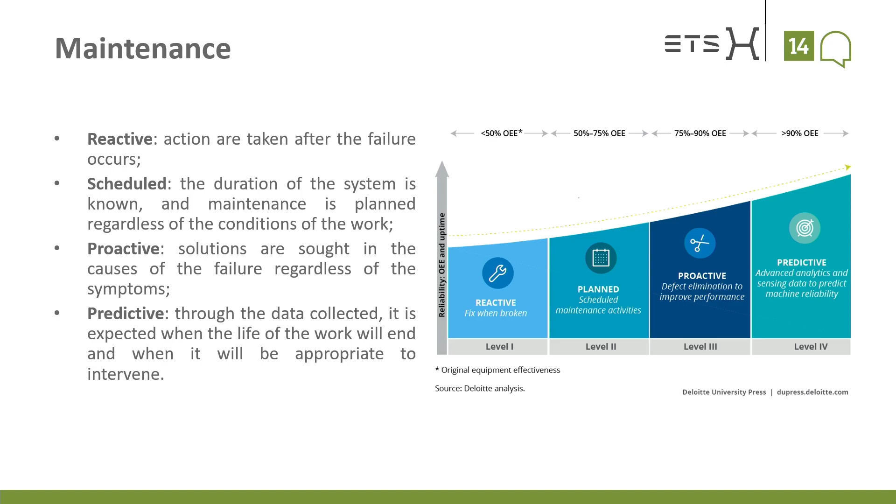They will say that to have an efficient plant, you need to have at least a proactive maintenance, not least a predictive maintenance. So obviously in our case we have a lot of randomness in our sector, but it's just to say that our maintenance is mostly reactive and planned. Only in few cases are we in the proactive, predictive case. So actually some of our colleagues will say that our plants, so our infrastructures and our tunneling also, are not so efficient from this point of view.

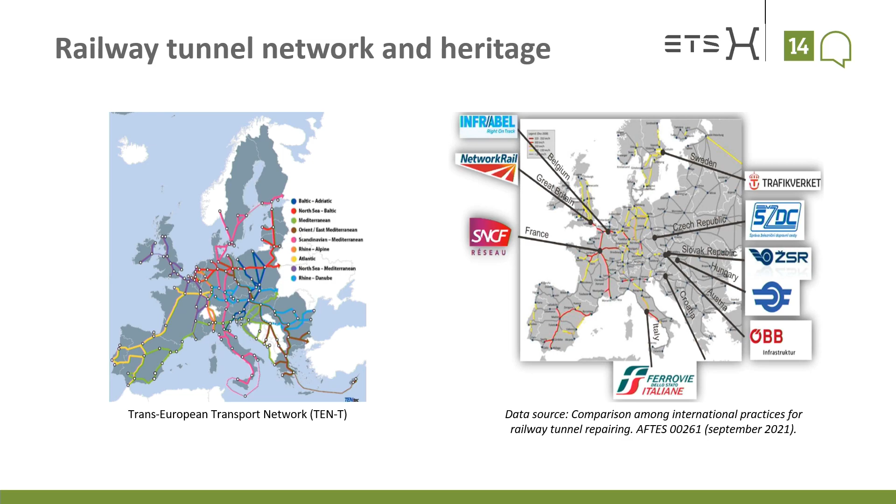In which framework are we going to talk about this? This is just an extract from a paper that collects data from, let's say, major authorities all around Europe. And here you will see some of them, all of them considering also the Trans-European Transport Network. And here we show some data for railway tunnels.

Then I will just add a few elements also for road and highways. As you can see here, we have a lot of tunnels in Europe, in Italy, in France, in UK. We are the one having the most tunnels from the railway point of view. And the average age of these tunnels is, in some cases, more than 100 years.

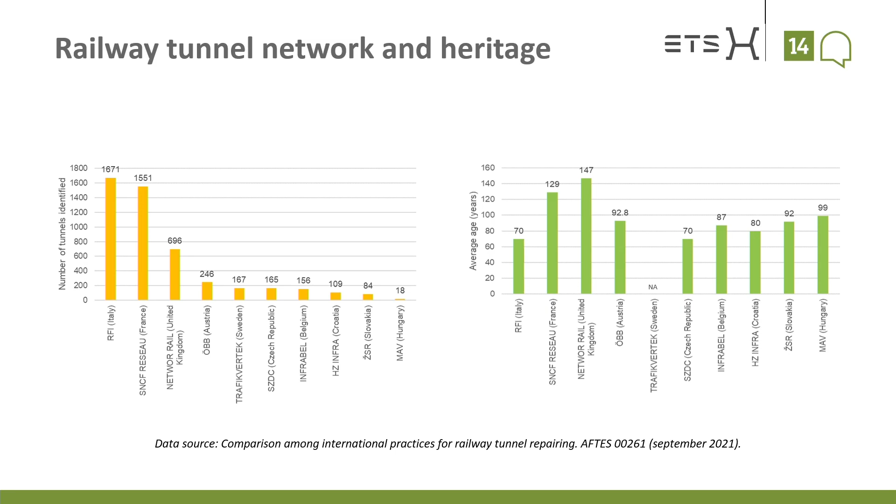The data from Italy is a bit biased, because in the last 20 years we excavated a lot of mechanized tunnels. This is the reason why, if you remove some of these tunnels, our average age would be the same as France, more or less. So we have a lot of old tunnels. They are like old people, and we are asking them, okay, don't retire, please continue to work, and we need to find some strategy on this to let them continue to work.

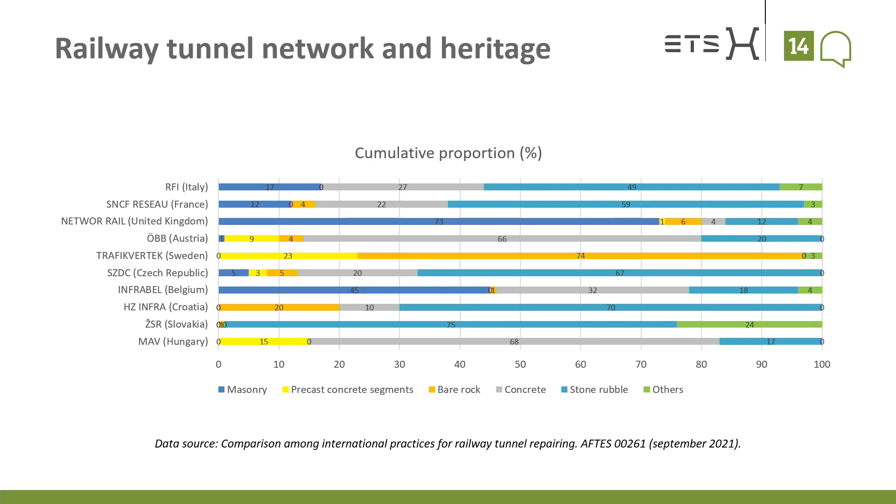Now we will go inside the framework. I will mostly refer to Archita when talking about technological aspects for tunneling, survey and inspection, and I will talk about MIRET for the engineering and analysis framework. You will understand in a few moments what I'm talking about. So the framework is called MIRET: Management and Identification of the Risk for Existing Tunnels.

The principles are the same. You can recognize some of the things Farid was showing in the previous presentation. What we are saying is that for the maintenance and management of tunnels, we need a holistic approach. It means we cannot analyze the single component. We need to analyze the relationship between these components, because this relationship makes the whole system more important than the single elements inside.

It's more or less like a human body. We cannot analyze just the arm or the leg to say, oh, I have an injury to my knee, so I'll just analyze the leg. I need to analyze the whole body to understand what is going on.

We will see what we can do from the innovation and state-of-the-art point of view for all these elements. First of all, the survey and inspection phase. Nowadays, we have a lot of mobile mapping technologies that can help. Destructive tests are really important, but we need to collect data in a less intrusive way, to increase safety and minimize the impact on traffic.

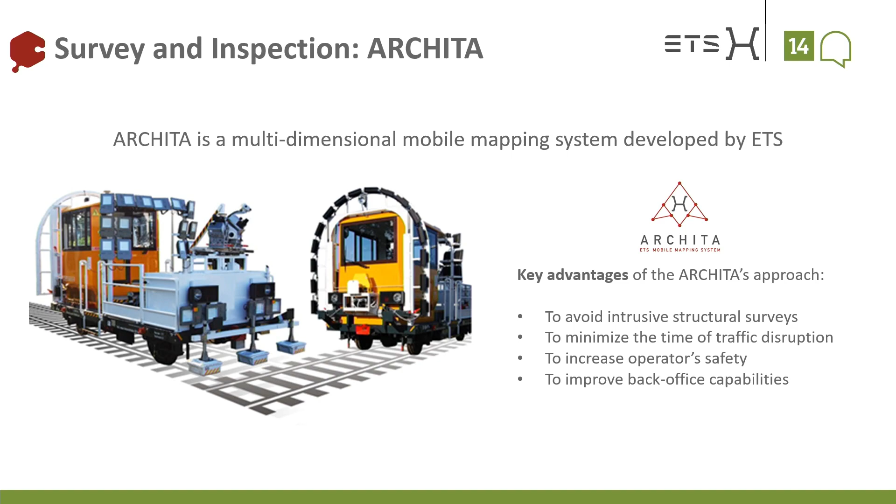This is ours. You will find other similar elements, but I will just talk about what is unique from this system. Archita is a mobile mapping system, multidimensional. We will see in a few moments what that means. Multidimensional is because in a single passage we can gather more than one type of information, more than one dimension. These dimensions are all taken together inside one environment, or multiple linked environments. So once we do the passage, we gather a multidimensional system.

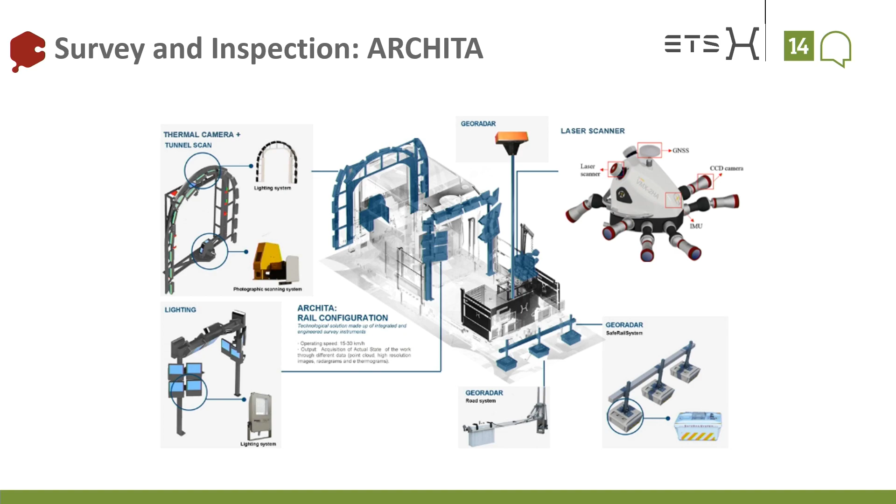In this case, we have different technologies. Here you can see laser scanner, tunnel scanning system, ground penetrating radar, and so on. But before talking about the system, let's watch a quick video that speaks louder than me.

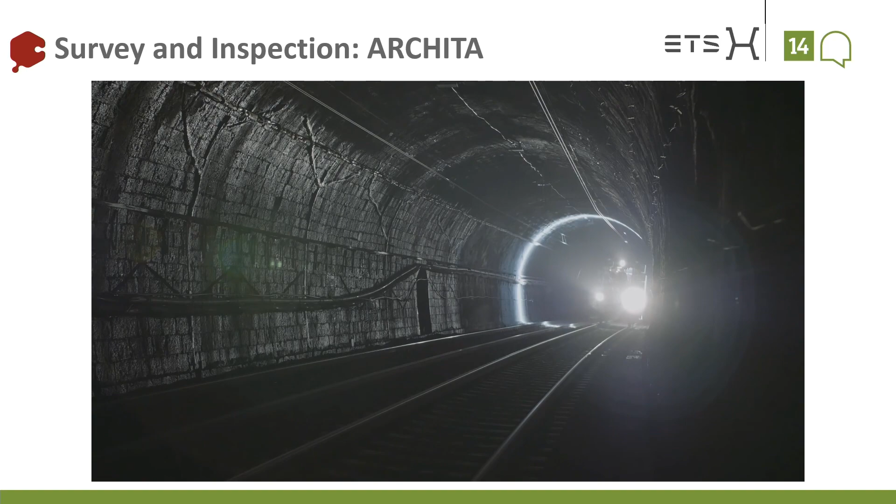As you can see, this is Archita going inside an old masonry tunnel, passing with this light all around. You can see our blue logo on the front. But that was Archita. In that passage, what was Archita acquiring? Let's see.

First of all, we have the scanning system, which is the equivalent of the inspection phase, like the traditional inspection phase. You have a photo scanning system that lets you acquire a prospect of the tunnel, as you can see on the bottom right. This prospect of the tunnel has a precision and accuracy of 1 millimeter, so we can detect everything more than 1 millimeter.

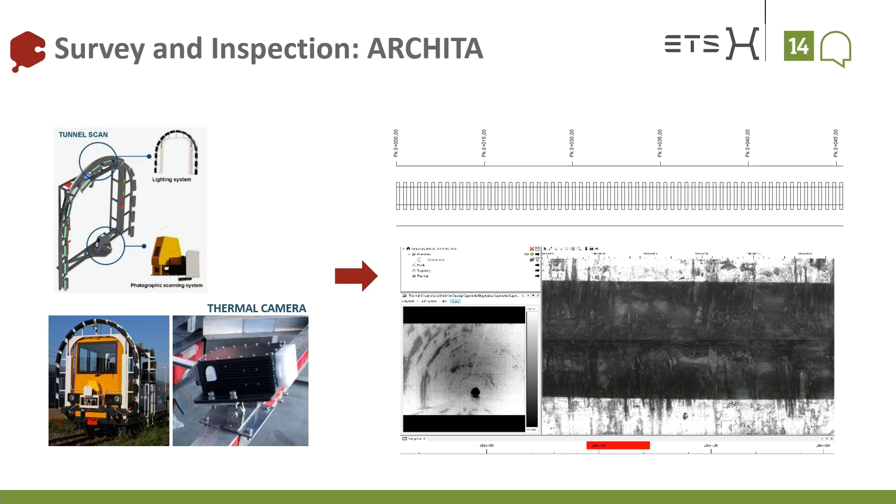Linked to this element, we have the thermal camera. The element you see on the left is the thermal camera, and everything has a profilometer, and everything is referenced. The elements on the thermal images correspond to the HD photo, so you can go inside the tunnel and see the correspondence between them. This redundancy is fundamental because, as you've seen from the previous presentation, one of the major problems in tunnels is water. It's quite normal, so it's fundamental to have this redundancy to better understand some of the problems you can encounter inside the tunnel.

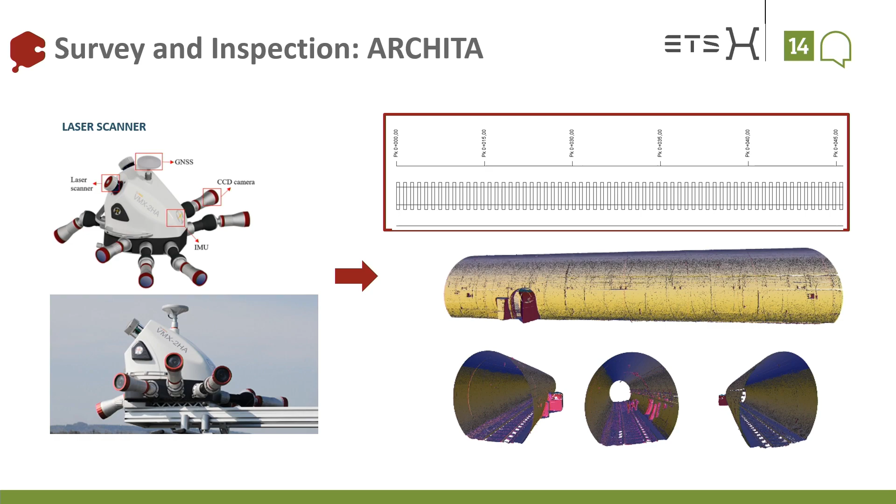Then you have a laser scanner. This is to acquire a 3D point cloud, and this is a really technological aspect. We bought a fantastic new laser scanner, but you can find a lot of fantastic laser scanners on the market.

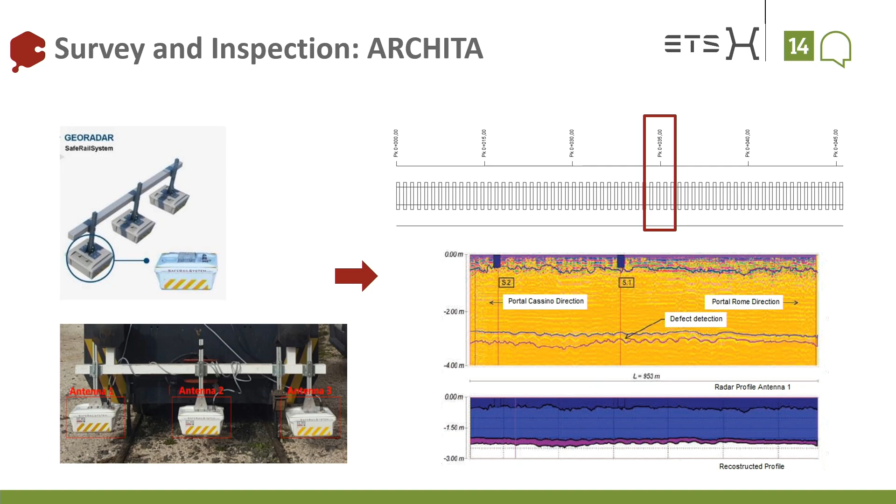Then we have ground penetration radar on the bottom. Ground penetration radar allows you to acquire information on the configuration, for instance in rail about ballast, about voids, about humidity, about thicknesses, and in the road configuration, about the pavement package. So this can work in both configurations, even if we are focusing on rail right now.

Then we have something that is quite particular. We have a ground penetration radar for lining, which has a semi-automated system to acquire data on the lining during the mobile phase. Right now we are also investing in robotizing this element, so it's something we are prototyping right now.

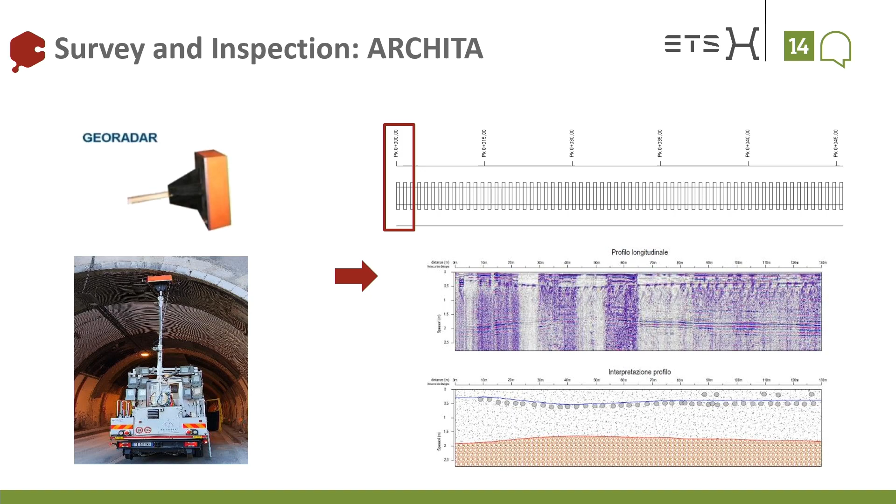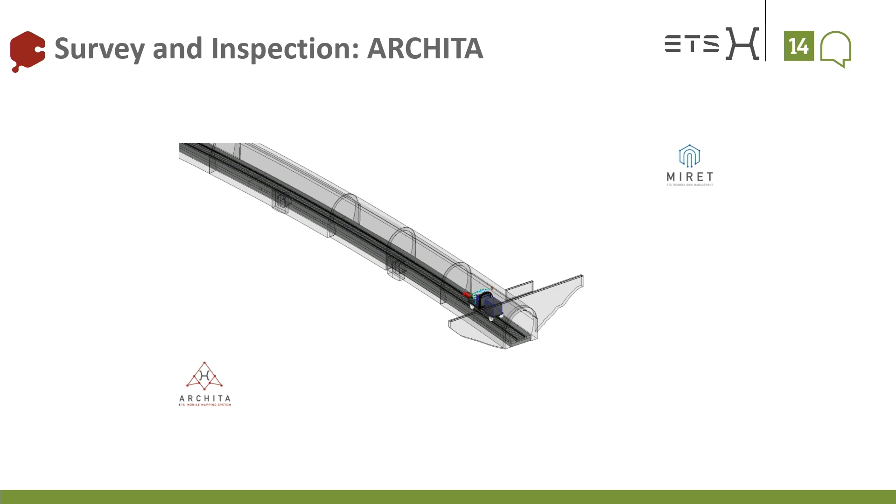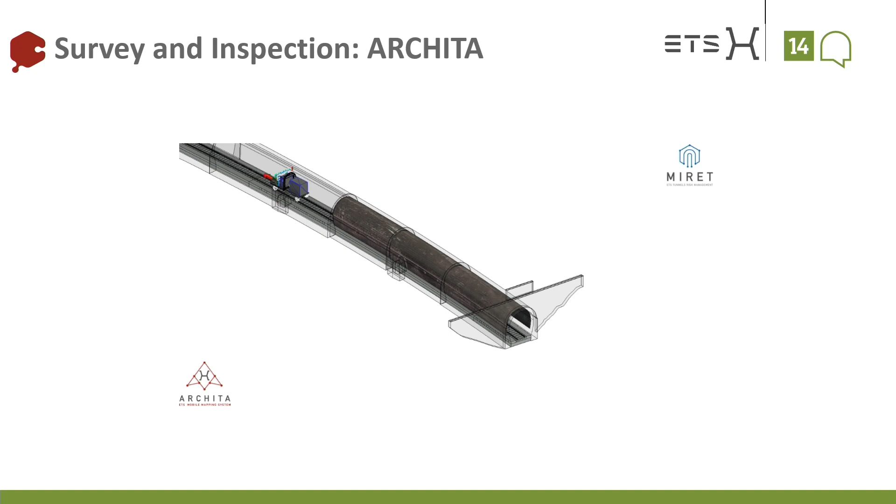Okay, then what is happening? This is just to help show some of the things I talked about. As you can see inside the model, this is a tunnel that we are going to see in the case study later on. So the acquisition of the image, the point cloud, the ground penetration radar and everything, what we are aiming for is the element on top: the vulnerability map of the tunnel.

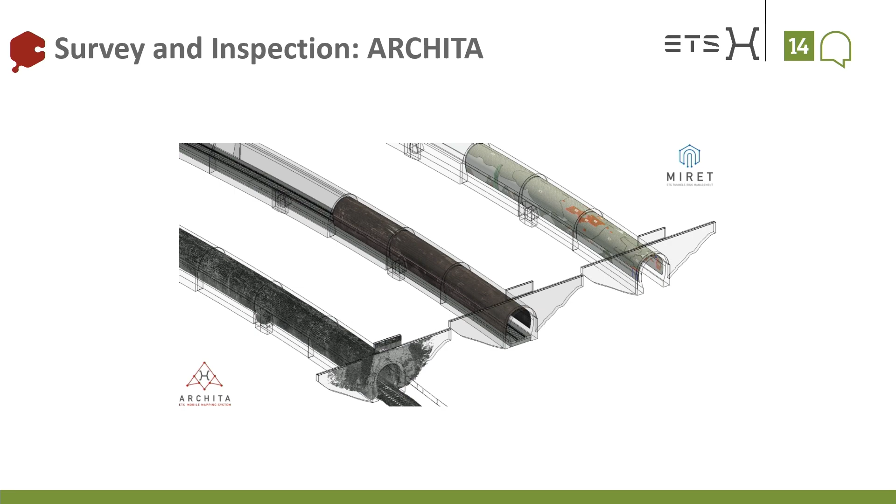Exactly, this is what we do. So we take all the elements in one environment, as you can see: the photo, the thermal image, the ground penetration radar. Then we collect them like a catalog, like Farid was showing. This is just an example. In MIRET, all the catalogs are integrated for the Italian market and some European standards, so we don't care if we are using one standard or another, they are all linked together.

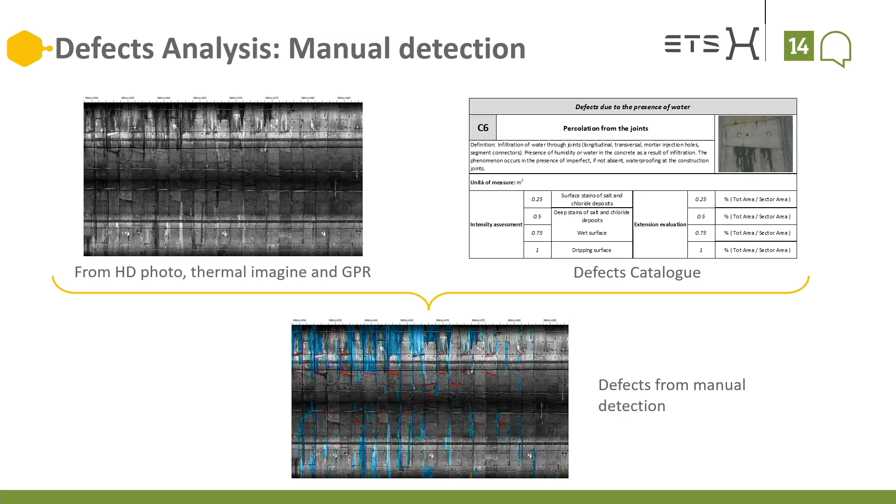So it means that if we are detecting a certain type of crack, this automatically links to the catalog of the authorities that manage the tunnel. What is the result? The result is an informative model of the inspection. So what you see downstairs is the image, and on top there is the digital twin of the inspection, just to use some fancy words that are really cool right now.

But then what can we do next? We do a lot of these inspections, we do a lot of vulnerability maps, so we've been gathering a lot of data since around 2016. With all this data, we started a project four years ago to implement a deep learning approach combined with image processing for automatic detection.

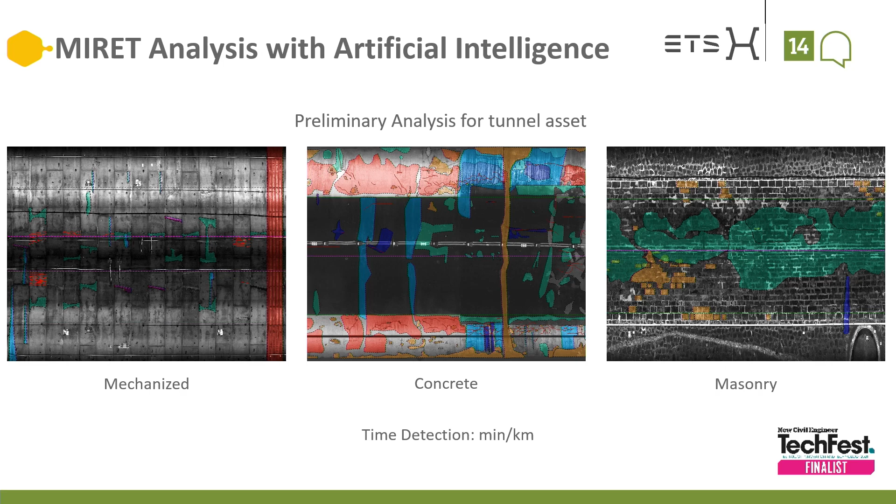This is a really time-consuming element. Just to give you an idea, for a detailed map you'll need at least one to two people working for a week to cover one kilometer. So it's really time-consuming, because this activity is fundamental for each European code. It's the basis for risk evaluation and maintenance evaluation, along with other parameters. So we need to assist, as was mentioned earlier, the people, mostly engineers and technicians, doing this activity, and a deep learning approach is quite useful.

So in MIRET we now have a system package that implements AI support for mechanized concrete and masonry tunnels, detecting detachment, cracks, and water defects. As you can see, these are really fancy images that work really well. We also have images that don't work so well, but engineers, when they elaborate this data, also make mistakes, so we can excuse the AI.

What is the next step? The next step is to take this vulnerability element, surface vulnerability and deep vulnerability, and combine them with hazard and exposure. In a multi-level approach, at the lower level they are combined with simplified considerations, while at the most detailed level they are quantitatively evaluated.

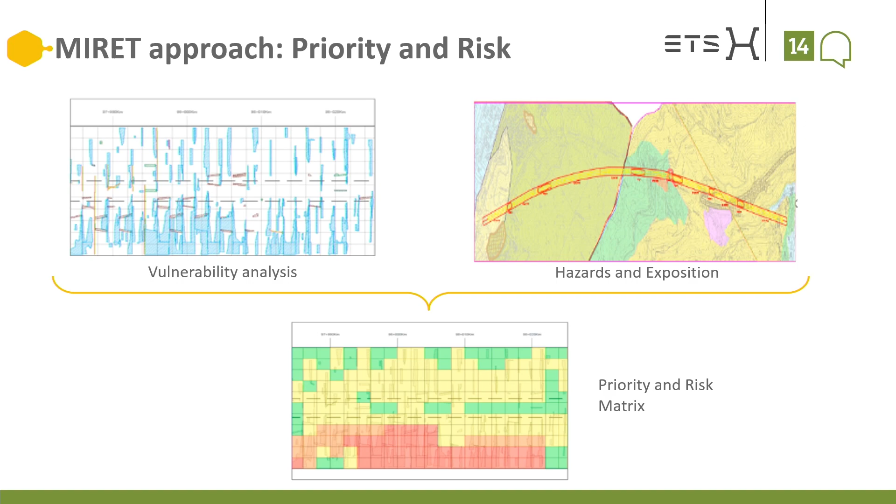In the end, what do we have? We have a priority or risk matrix. That is the digital data that we manage inside the system, which is automatically processed inside the system. Priority is used when we have a qualitative risk analysis, and the risk matrix is used when we perform a quantitative analysis inside.

Then we have digitalization. So we got inside, it's a lot of these tunnels, sometimes we even have no information at all. There are tunnels like more than 150 years old, there is no information at all. Archives that don't exist, sometimes they got burned during the Second World War, in the 60s, the 70s. There are no data at all.

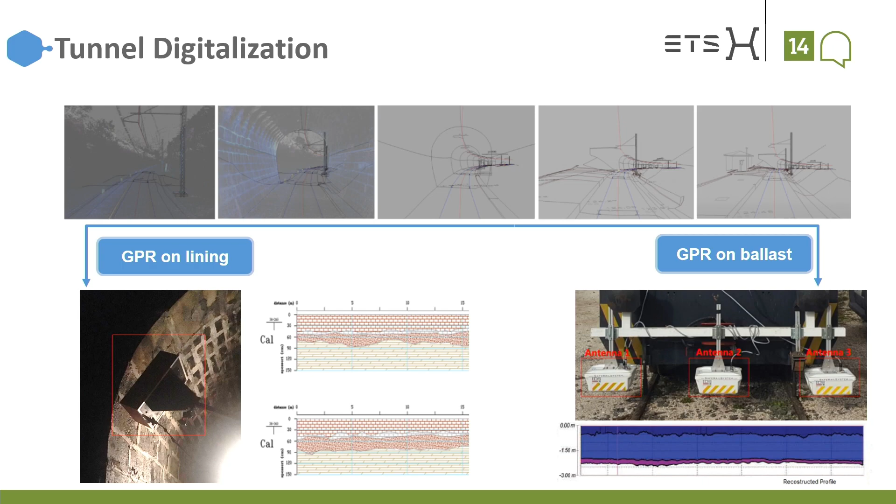So we go inside, and with the 3D point cloud and ground penetrating radar, we are able to get a model with the basic information level. Basic information level - we're talking about requirements that generally come from the clients - is sufficient for the preliminary phase, what we can get here. But obviously then we need investigation campaigns and other detailed processes inside. Then we can integrate this solution for designing.

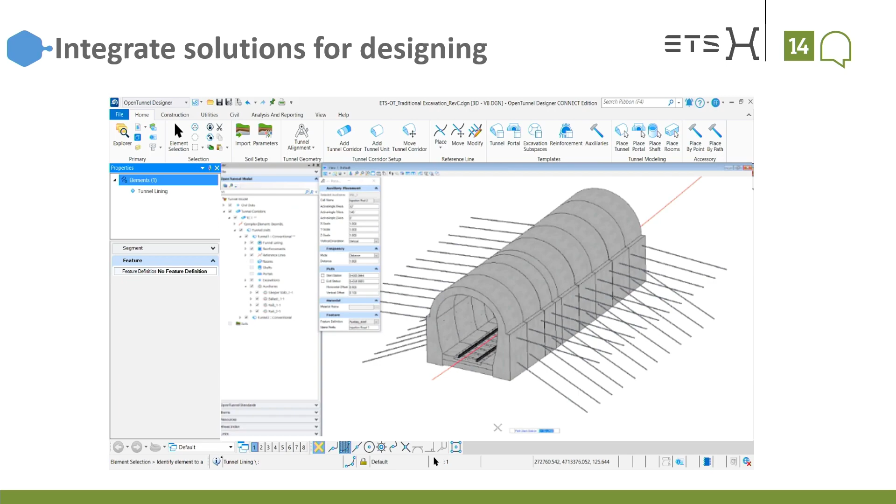You know that we have a lot of solutions on this. This is just showing one that we are collaborating on a lot. And now we can integrate this element directly into the design element. This is possible right now. And this is also possible - coming back to this, this is just a screen for the software I was talking about, our software for artificial intelligence and everything inside, also allows the planning phase.

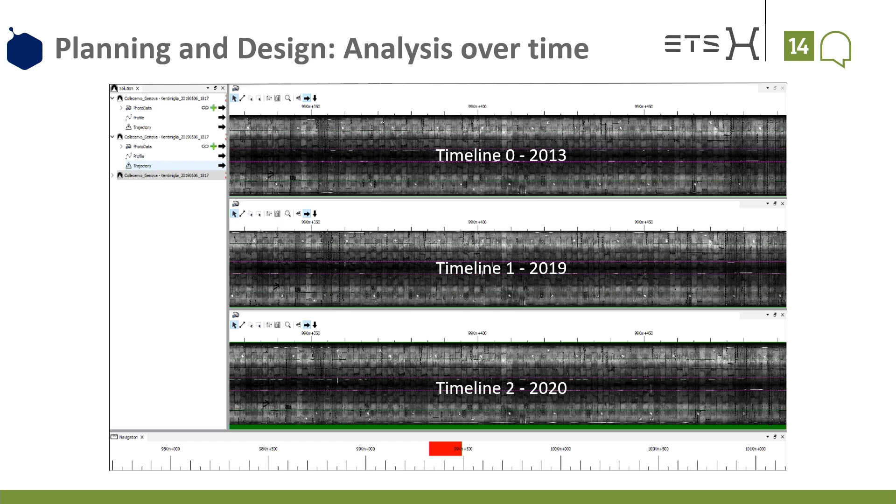So, analysis over time - it means that you can get different timelines inside, and then you can get the information from this timeline and compare them through time and so on. Here you can see an example of a mechanized timeline that we did in 2019 and 2020. The data from 2013 is synthesized data. So we get the manual inspection and we synthesize the image based on the manual inspection that we get. That was mostly on cracks in this case.

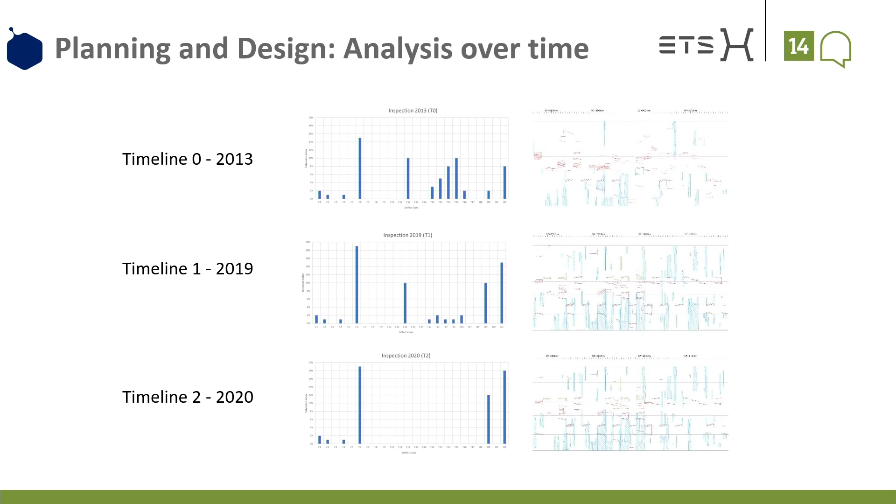And then this is an example of the digital map of the inspection, some indexes that you can get. There was another one showing the difference here, that everything is digitalized. So I would say it's a bit smoothed together, all the things.

For the planning phase, I will also say a few words about sustainability, but a practical aspect. I will not - this won't be a rhetoric moment, but just an example of how important this is. For instance, if I take one of these sustainable development goals, like the 16 - I think we all agree that peace, justice, and strong institutions are important. I don't know, if there is someone that disagrees, can raise their hand. Okay, all of us agree on this.

Then we did a survey at the main fair and exhibition where we're talking about the transportation market, and if you look at the sustainability reporting, the commitment, and so on - for instance, the 16 sustainable development goals is never inside. So we all agree that peace is important, but then what are we doing in reality to make it real?

And I live in Milano right now, I'm in front of the central station. I don't know if some of you know that the central station was used to secretly deport Jewish people. There was a mechanical system, even sophisticated, for the area to bring them. So the Railway National Authority in Italy was, let's say, blinded while everything was going on. So it's not so easy to say, okay, but we all agree on this - then we have to do something.

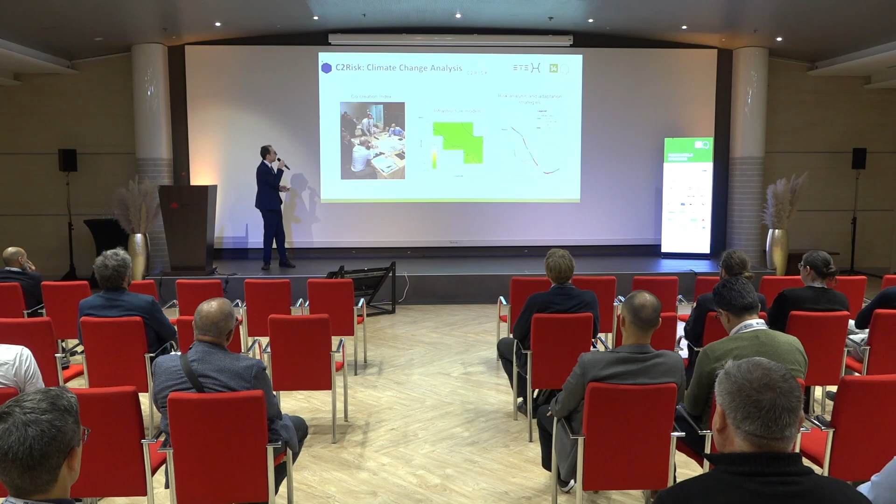This is just an example, an extract from the report. So we can, for instance, cut the carbon footprint - this is the climate change mitigation part - up to 16 times compared to standard methods. I think this should be related in some way with something else. Regarding the other elements - water, circular economy, pollution and so on - we are more or less the same, we have less impact but not so much. And regarding climate change adaptation, which is based on risk - you know, I use the word risk a lot, but I think it's important.

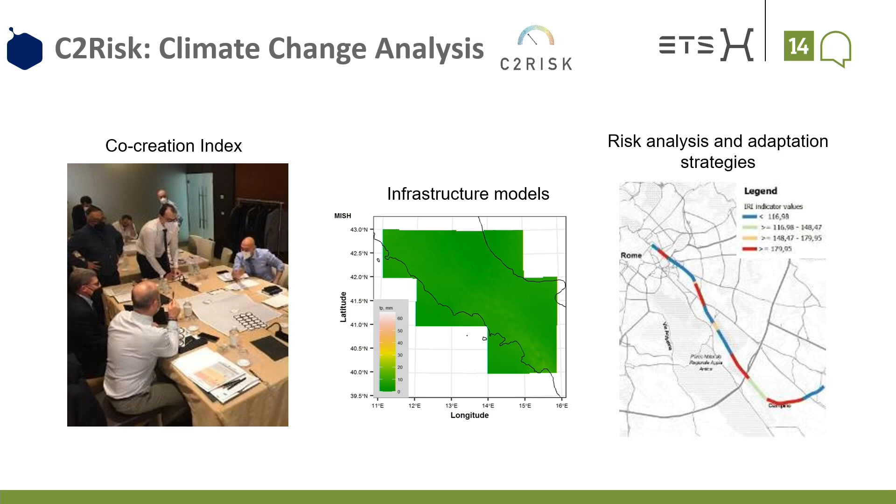We developed another project called C2Risk, which is climate change analysis. We brought together universities, the National Railway Authority in Italy, suppliers, and contractors, using experts from those people. We used a structured way to build vulnerability elements, supported by a socio-mathematical approach. Then we applied the hazard part for the infrastructure using meteoclimate downscaling and analysis of variables. In the end, this year, we completed the first railway in Italy analyzed with a complete vulnerability approach for climate change scenarios.

This is good because if you combine this with the other approach you've seen, you can understand better, in a single framework, all the risks that you have. This is the final aim.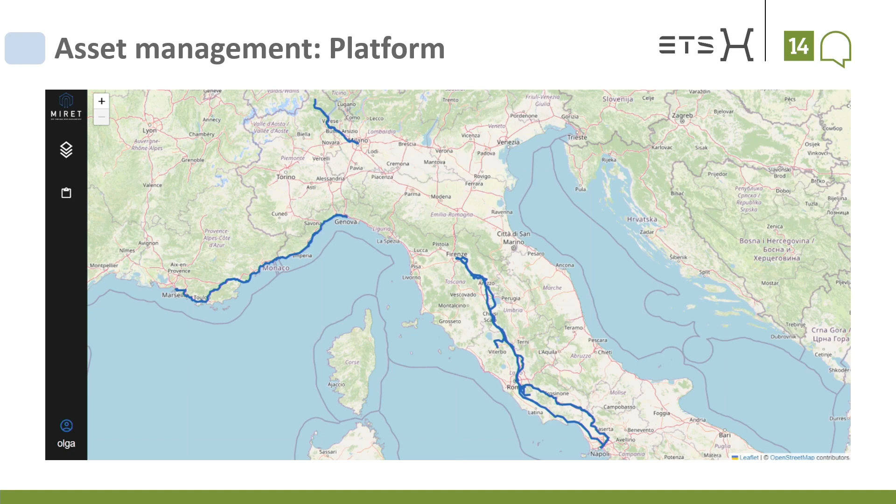This can go, and this is just showing an example. Everything goes inside an asset management platform. This is just us, but it's showing an example. The best thing is just to see the flow of the data from the contractor and the authority, understand that flow, and integrate things to ease the work as much as possible. This is, I think, the best suggestion I can give.

A few slides about a case study, to see practically—everything was case study inside the first part—but now to see practically in one really simple tunnel, let's call it simple.

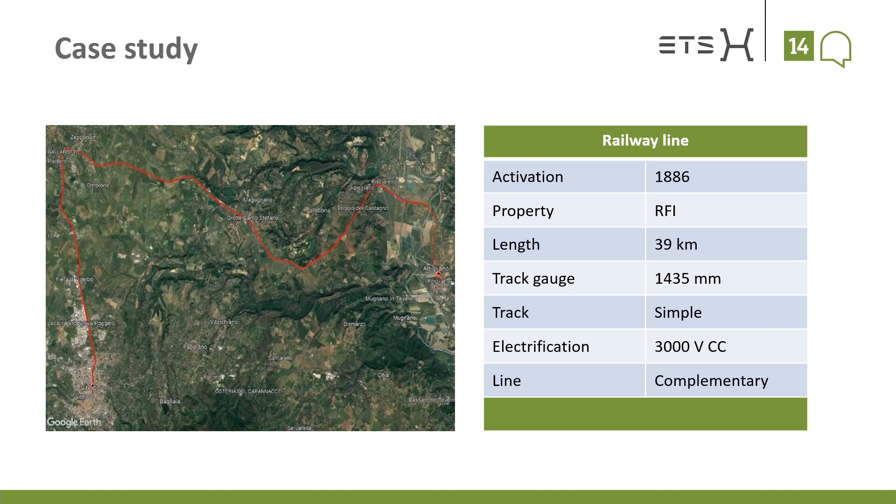The opening of this railway line was in 1886, and the tunnel was built more or less in 1880. We are talking about an old masonry tunnel that had a lot of challenges when we joined the project in 2018-2019. We have two closed tunnels, but we will just see one.

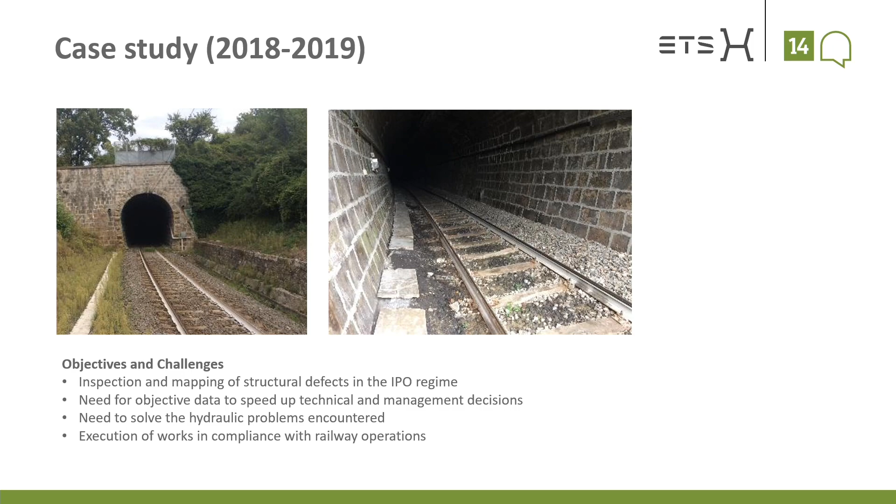There was no previous data about the geometries or the state of the tunnel, so they asked us for inspection and mapping during the programmed interruption regime. They asked for objective data, because a lot of people had a lot to say about this tunnel, so it was really important to have an objective basis to talk about it.

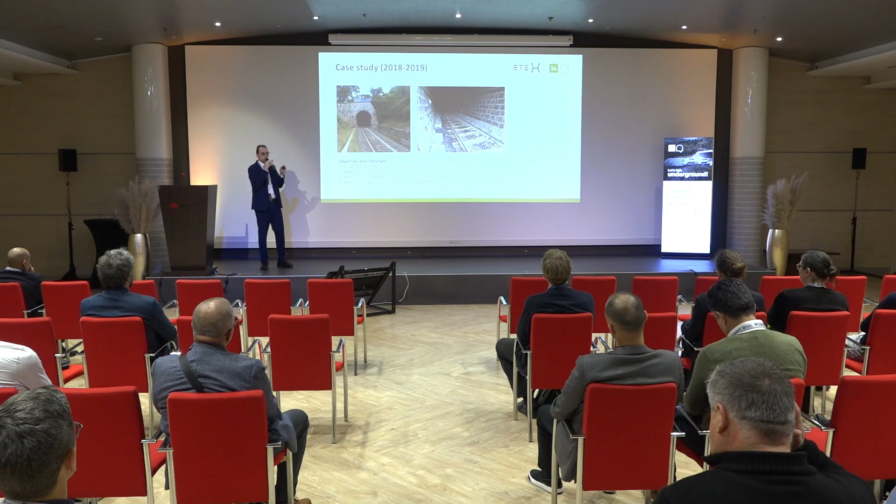In this case, in 2018, we were called about some hydraulic problems, but most of all they asked us to execute this work in compliance with railway operation—an interruption regime of 3 hours during the night for a month, with just a few days available to close the line if we had to use a more invasive strategy.

So here—I don't know if you can make it start.

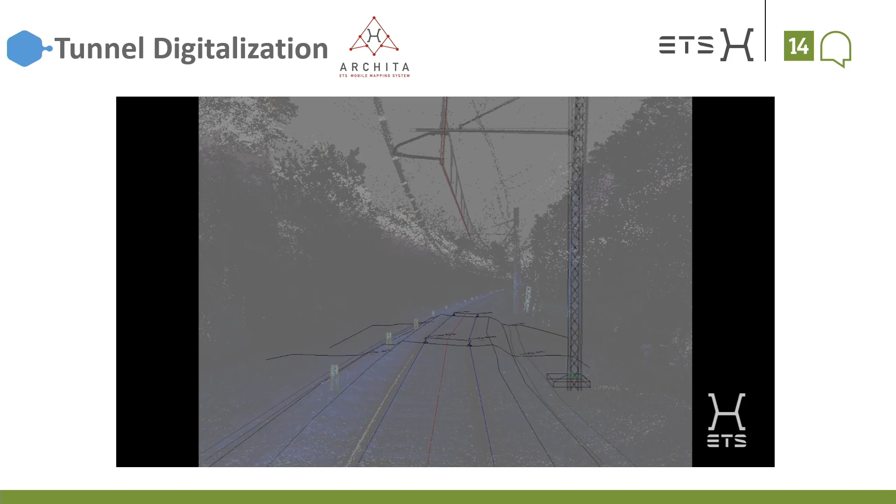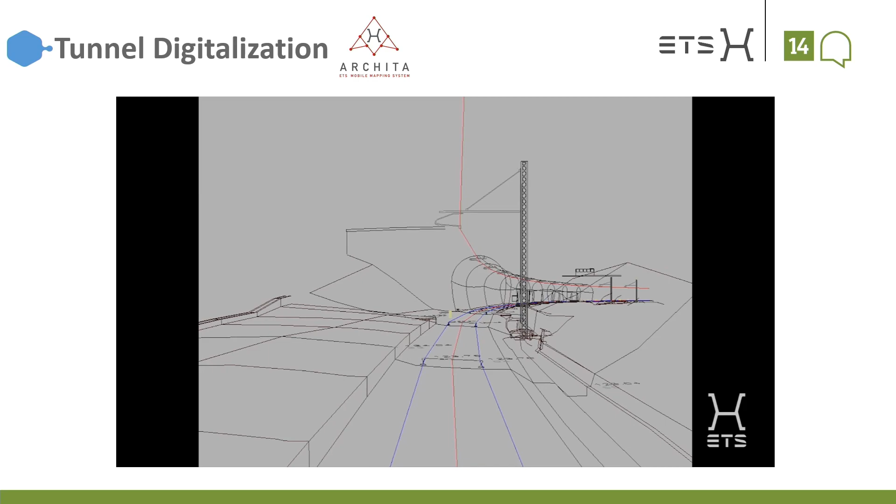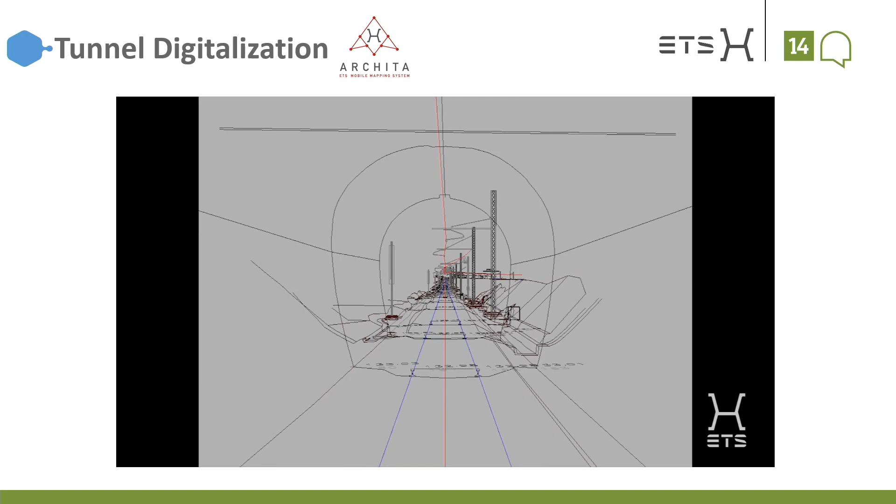This shows the practical example of the digitalization process we discussed, Archita, along this line. Here we pass to the first tunnel, then the second tunnel, then the station. It's not as fancy or automatic as it may seem, but it's also not as problematic as it could seem. This really allows you to have a representation that can help the evaluation, especially in railway, where it's really important to have a lot of detail about the rails and the infrastructure.

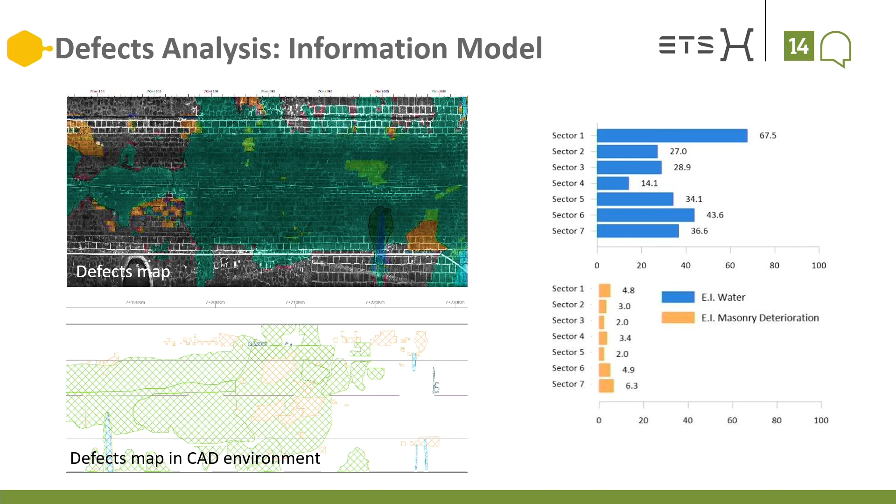From the Archita data, we perform everything shown before—the defects map that can be extracted and produced for each kind of analysis. Here you can see the example for deterioration and for water, across all sectors of the tunnel—an example of the map, for understanding the problem.

We also had traditional investigation campaigns and performed a lot of analysis as part of the design process, in the end to understand what the main problem was. So yes, we have water, but the point of a design approach aiming for a quantitative risk approach is to understand the problem itself.

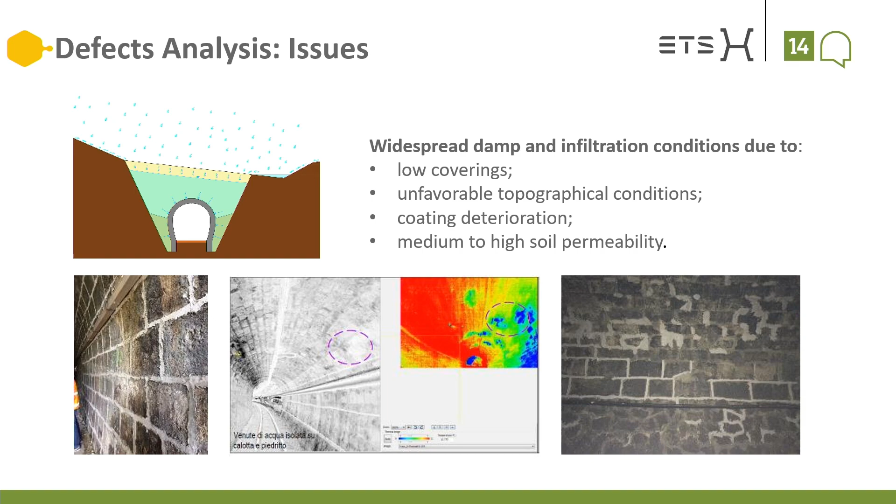In this case the problem is really simple if you see the image: we have a cut-and-cover tunnel, with a trench containing mostly clay—undrained soil at the bottom—and really heterogeneous materials on top, used from different excavations during the process. Basically, this trapezoidal element is actually a hydraulic tunnel with a hydraulic trench. So the big problem of water was quite easy to understand looking at this image, and we have a lot of evidence inside.

All the water detection in this case was fundamental, water and masonry for the vulnerability maps. These were the major elements, so we focused almost all the attention on this part inside.

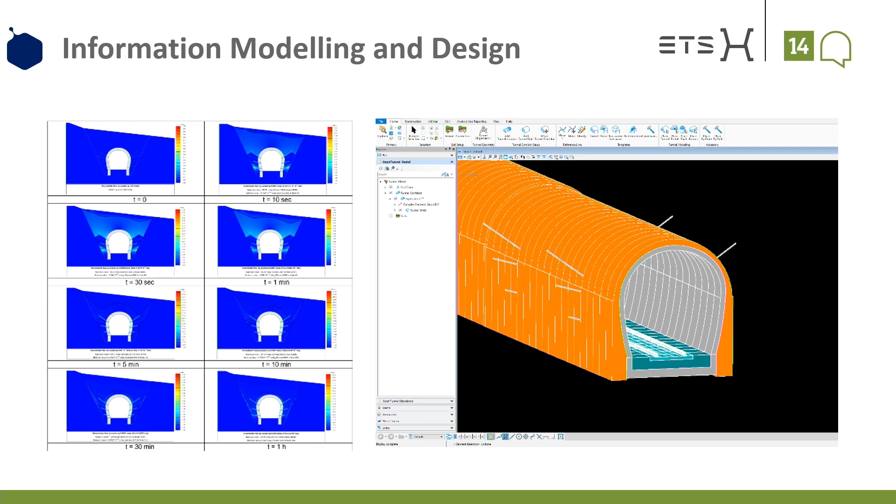Everything was done with an information modelling approach, and from the design point of view it's quite useful. Then comes the process of the choices—so we have mostly consolidation and drainage systems here in the different areas.

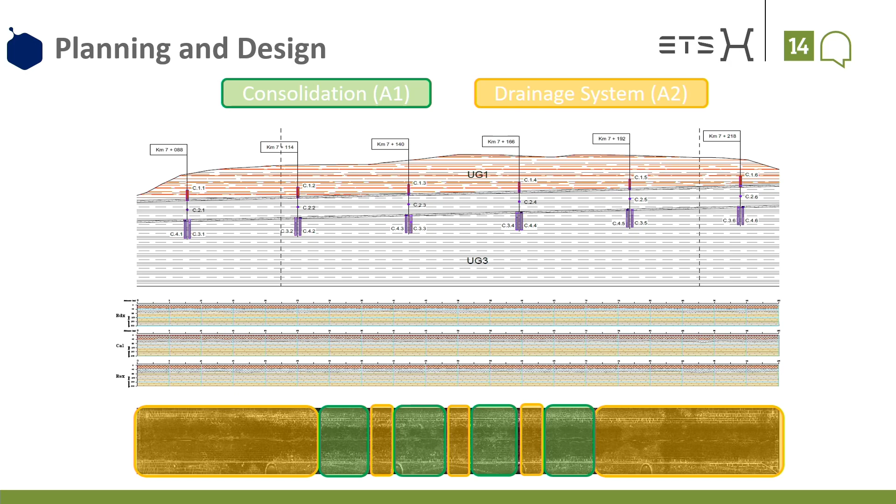You can see here an extract of a profile and ground penetration radargrams from ground penetrating radar. And then we have works of maintenance.

Here you can see some images from the construction, just to show some of it. Here the problem was a hydraulic problem, so we focused mostly on drainage inside the masonry system.

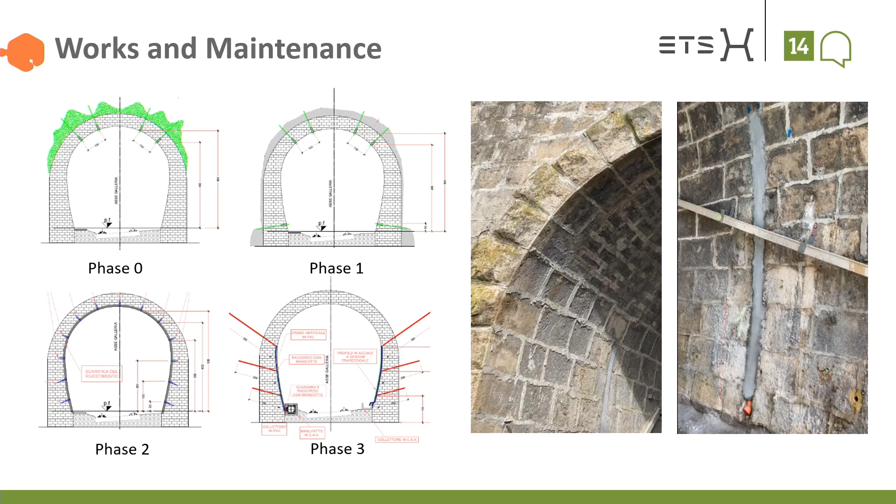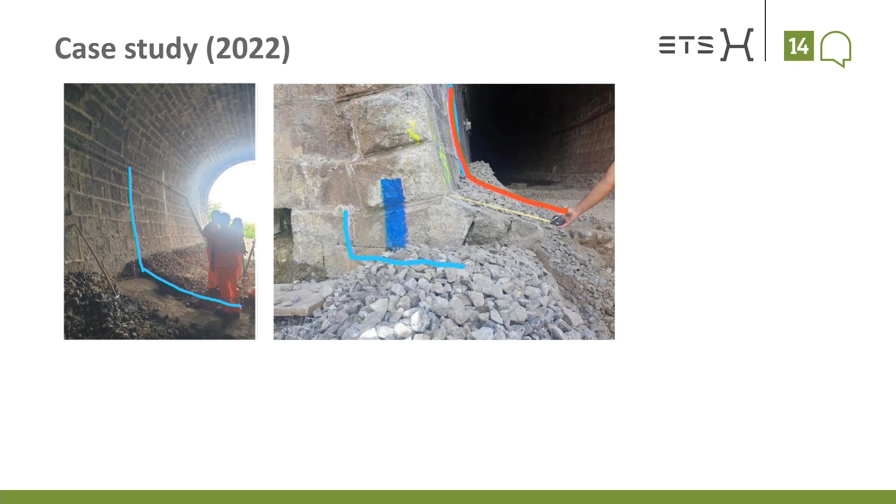But then we finished the work, and what happens? It happens that in 2022, the contractor for the rails and rolling stock was there doing some work, and they found some ribs of invert—something that we had flagged as an alarm during our project.

But then the data was not structured from one department to another, so we had a really practical problem.

I can't forget this—I was at a wedding on August 13th, and then they called me and said, no, we found some ribs, we'll cover everything and finish this job. Now we need to perform a new evaluation to understand what the problem is.

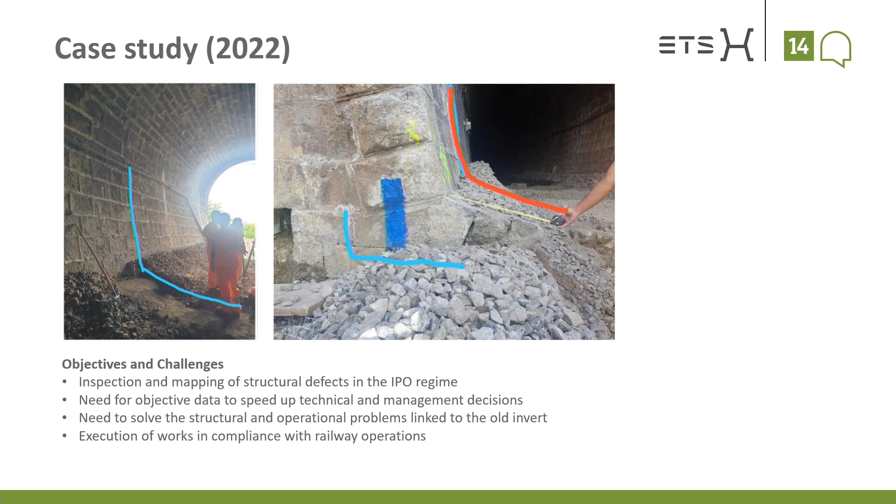As you can see, the objectives and challenges are always the same—not a completely different problem, more from the structural point of view, different department, different elements, but the problems are exactly the same. So a new survey, in this case with traditional methods, because we analyzed a really short stretch.

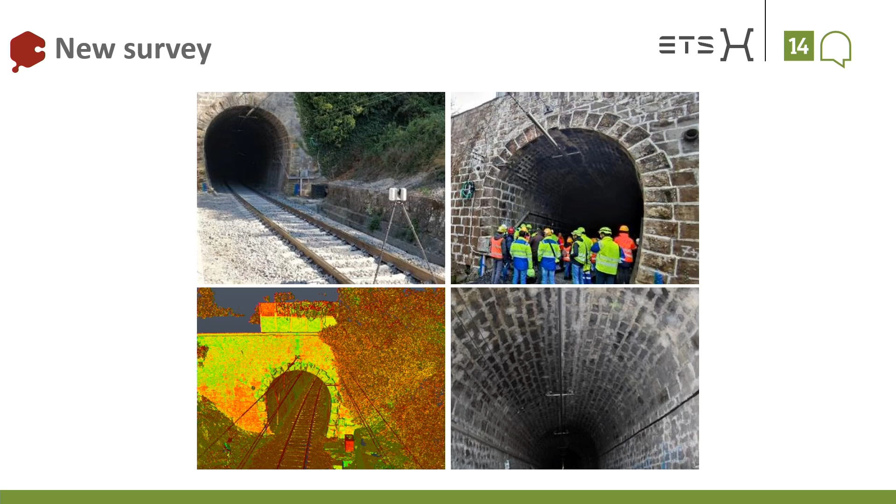So we performed a traditional laser scanner, traditional inspection, and a new defects map that was put inside the asset management system. As you can see, the intervention in 2019 worked fine, luckily for us.

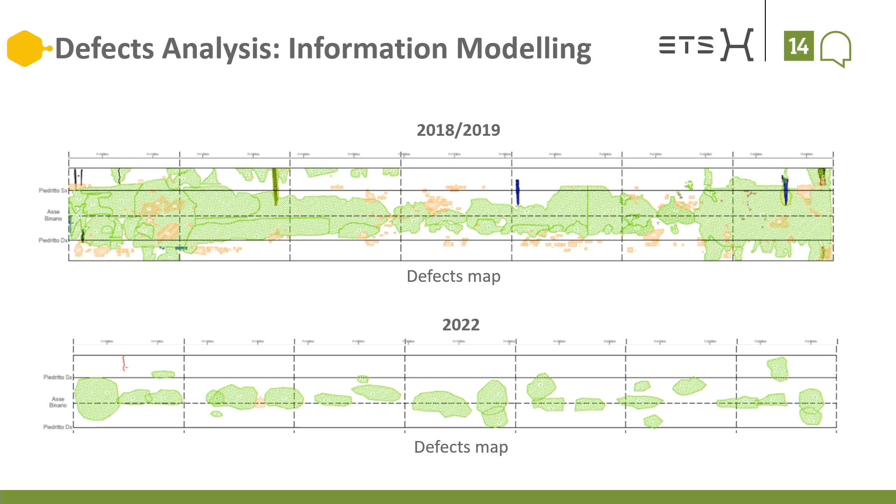And so the water defects, even though it was raining a lot the day before, were really reduced. But here the problem was facing the same process.

So again, an information modelling approach. As you can see, we started from the as-built of the previous phase, and then we analyzed the new construction phases. Everything was analyzed again, and the final intervention aimed at where we found these ribs.

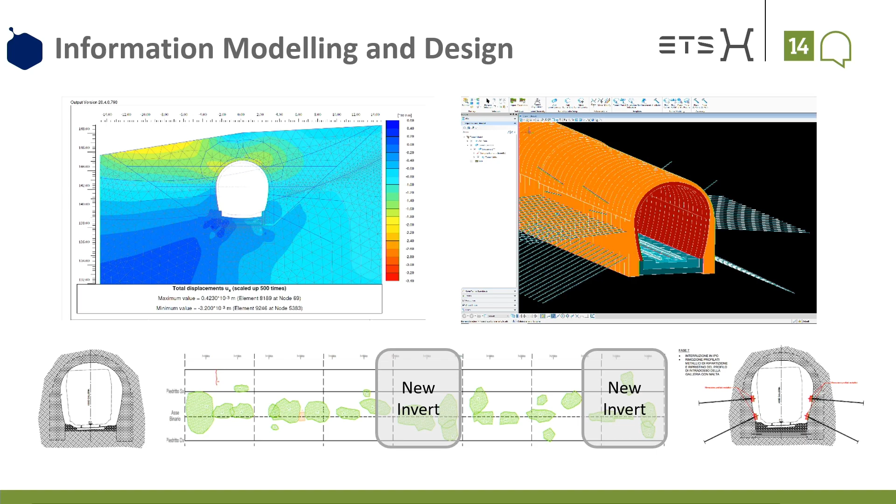At the end, we focused on the project of a new small invert in reinforced concrete that was linked with the masonry structure. For the other element, it was sufficient to use a reinforcement system, starting from injection to anchorage and so on.

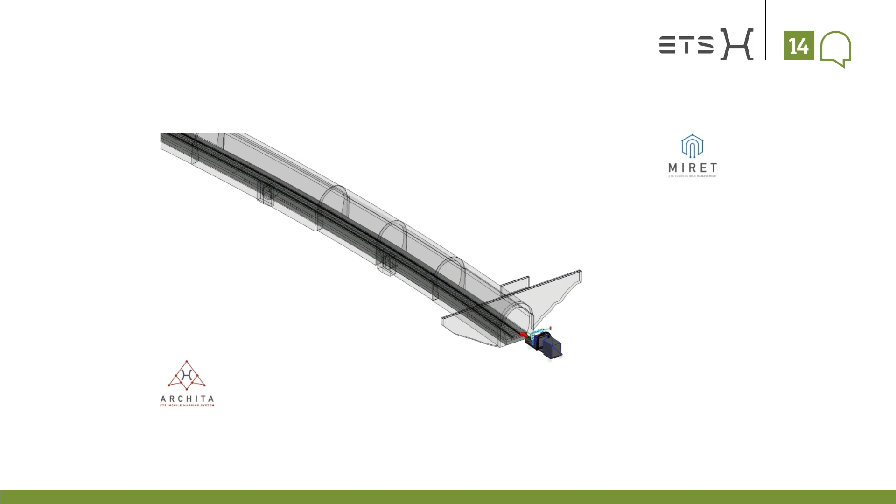So I'm almost finishing. This is just another video to show the process that we saw before, but at the end you also find the as-built from the cases that I showed you, especially the 2022 one.

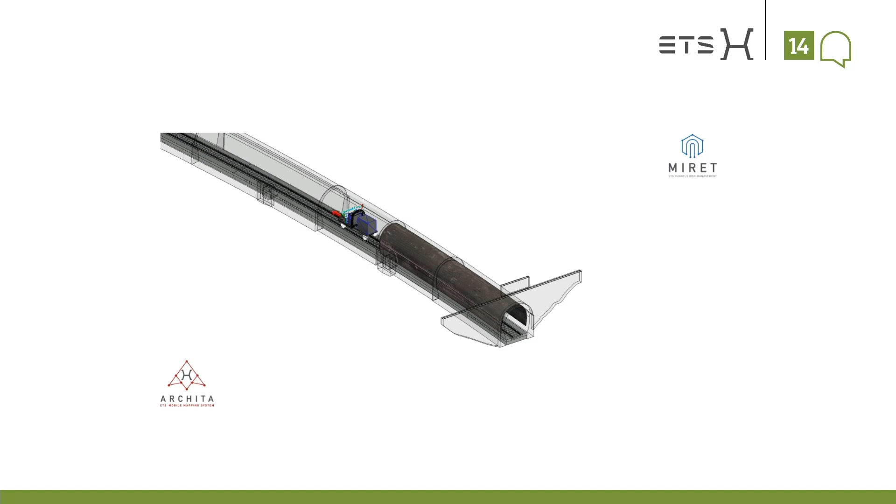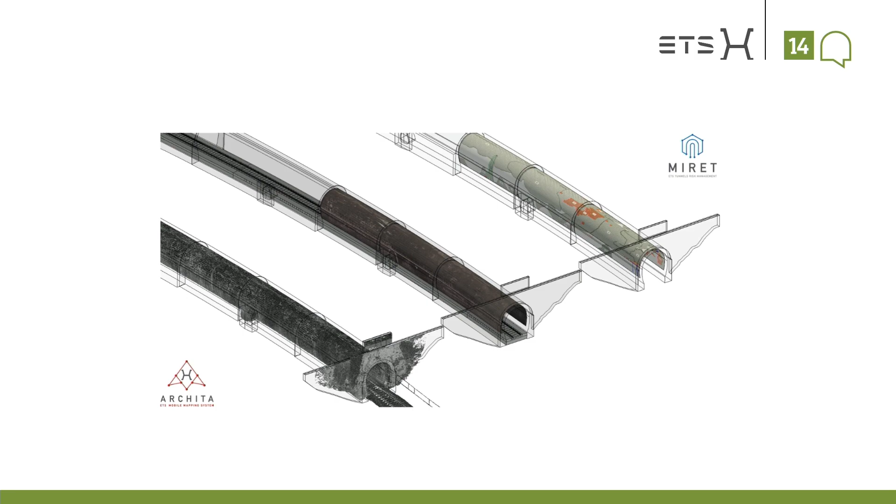This is just to say that in this case, a really important lesson learned was that, okay, the system from the authority's point of view was not completely integrated, but the people knew that they had this data and knew about the process. So when they found the problem, they immediately said, okay, we have the system to look into this.

We were able to immediately get the data, really fast compared to the time of design and construction that can take years sometimes, especially from the planning side. The first elements were done in days here, because we already had a framework in place with all the investigation campaigns, the models, and everything we did.

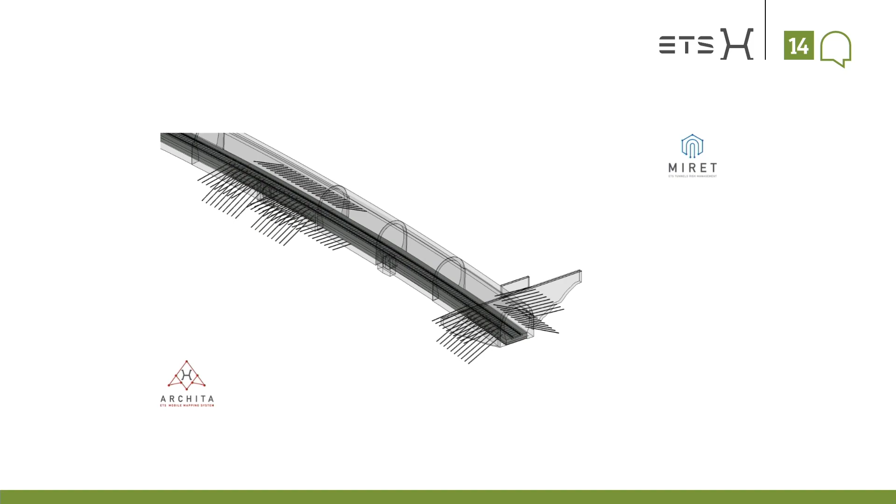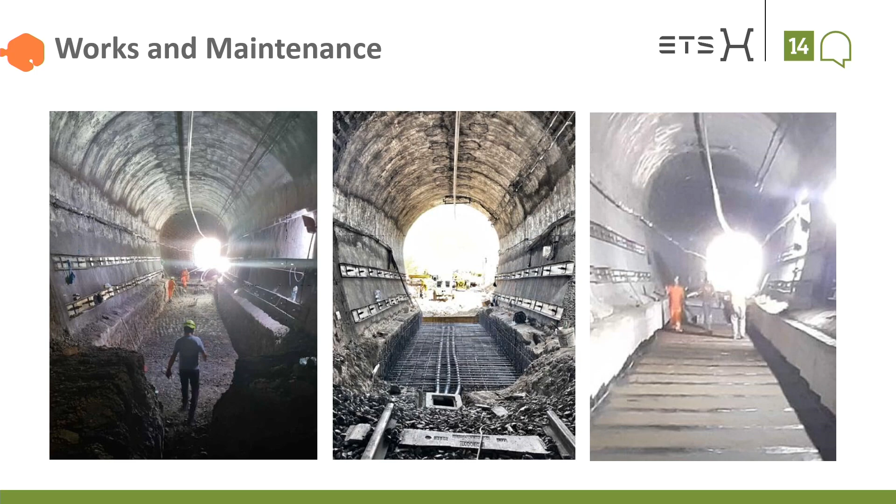It's always nice to be shown this. In this case, for the invert works, everything was fine. For the 200 meter tunnels, the job was done in less than 10 days, more or less, everything you see here, with a lot of technological adjustment during the construction phase, and we are quite satisfied with the results. Thank you for your attention.

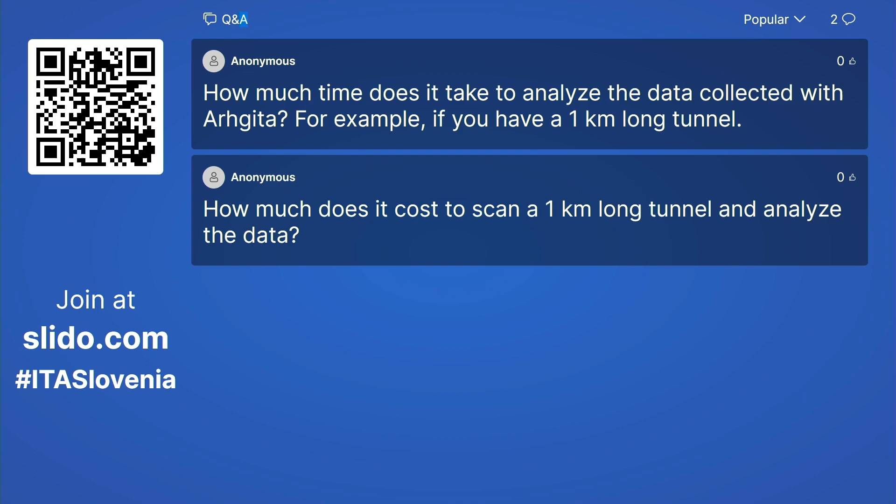Regarding the system, from the engineering point of view, the correct answer is that it really depends on the context that we have. But I'll give some insight on this question. First of all, we are engineering technical people. It would be, from my point of view, really stupid of me to say, oh, it costs like 1,000 euros per kilometer, or it will last 2 weeks for 1 kilometer of data to analyze everything. It would be really stupid after everything that I proposed here. The point is that this is a design process.

When I perform a survey, it is designed in a certain way, and it's inserted in a plan which is designed the same way around. So the point is that we need to understand logistics. We need to understand how many kilometers we are doing in the same stretch, which interruption regime we can have at our disposal, because maybe we have 2 nights and we can perform like 20 kilometers of tunnel in those 2 nights. But then we have like 2 weeks of interruption before we can go back, so logistics matter twice, and this is really common.

For people working in the maintenance and inspection field, this happens all the time. You always have some problems, then you have to go back the next night. Maybe you have to go back after 6 nights, and everything is really decided on the spot when you perform. So I can give some elements to consider.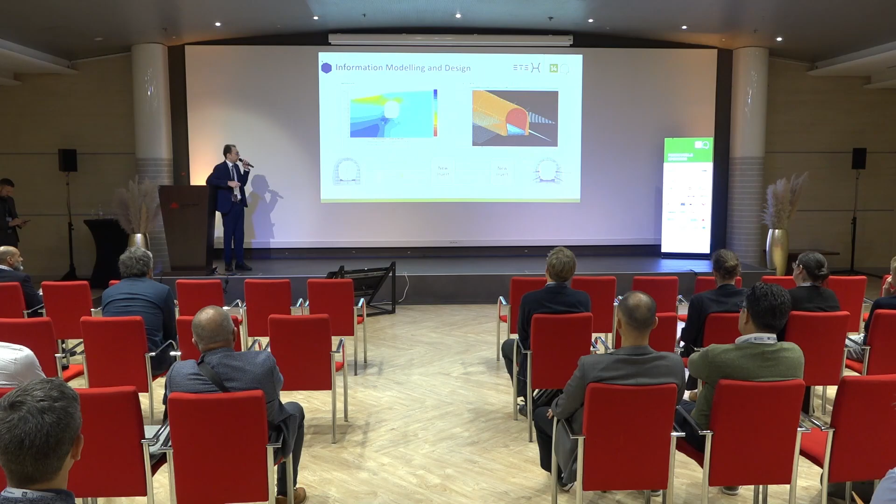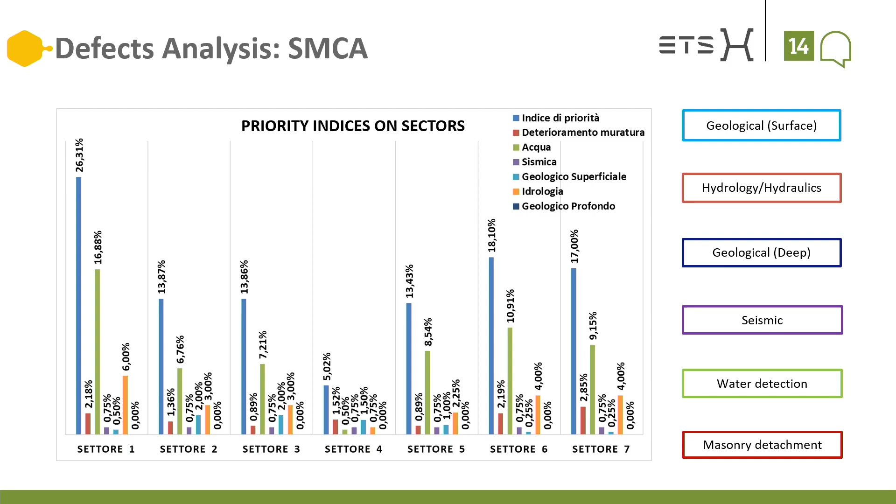This is a multi-criteria approach, as you can see here. For a multi-criteria approach, you need some weights put inside, and these weights are calibrated not only by our consideration, but also based on the experience on the line. Putting together the experience of the authority and the analysis that the design made, everything was put together to calibrate this factor, because you have territorial elements that are really important, not only technological but also territorial. You have urban elements that can interact, you have user accountability in some way, so all these things need to be put inside the approach.

I don't know if that was okay. All right, we still have a couple of minutes. Some more questions? Yep, Farid's got one.

Hi, just a quick one. How fast does the vehicle travel? And in terms of per kilometer or whatever it is, how long does it take to scan the tunnel? Because that's probably dependent on your equipment.

Depends on the configuration, but it works at around 20 kilometers, between 15 and 30 kilometers per hour. This is why I was saying that in 2 nights, with standard interruption, we do more or less 20 kilometers. It depends on the configuration - obviously for the ground penetrating radar you need more passages for the longitudinal side, but for the diagnostic element you just pass one time and you're okay. Also for the topographic configuration, one passage and you're okay.

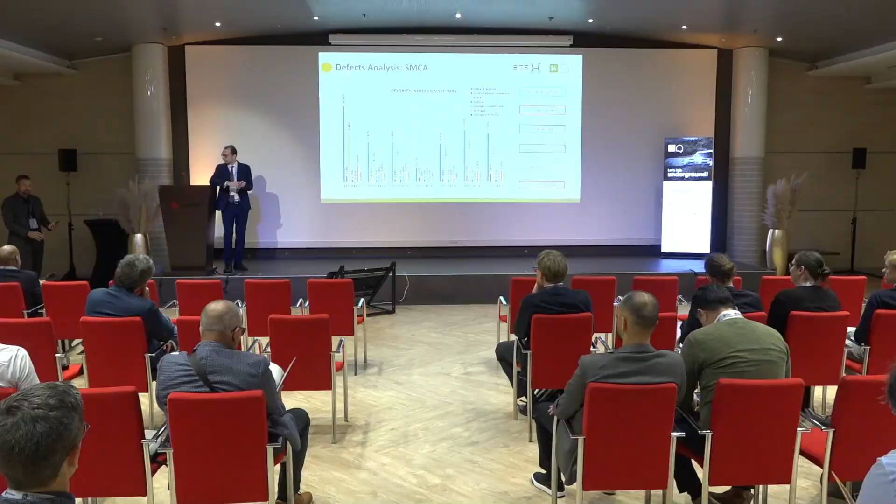All right, 2 minutes, one quick question maybe if there is one. Yep, there's one.

Just a quick question, if you can give a bit more information about the risks you mentioned. You were talking about risk a lot. What do you mean by risk in your context?

Thank you. It's not a 2-minute question, sorry. No, we can continue at lunch. Yeah, it's really an interesting topic.

I like the question. So what we mean by risk, without going into the academic definitions, here what we mean is to have an objective evaluation that can help us prioritize elements, to assess a particular loss or gain that we can have with a certain event happening.

So with these things in mind, risk is a multi-level approach. Multi-level, not only for the detail, but also for what we assess.

In Italian regulation, for instance for highway road tunnels, we have two levels for the qualitative risk: global risk and hydraulic risk. In global risk, we have global structure and geotechnics, local structure, geology, seismic, and the road infrastructure part.

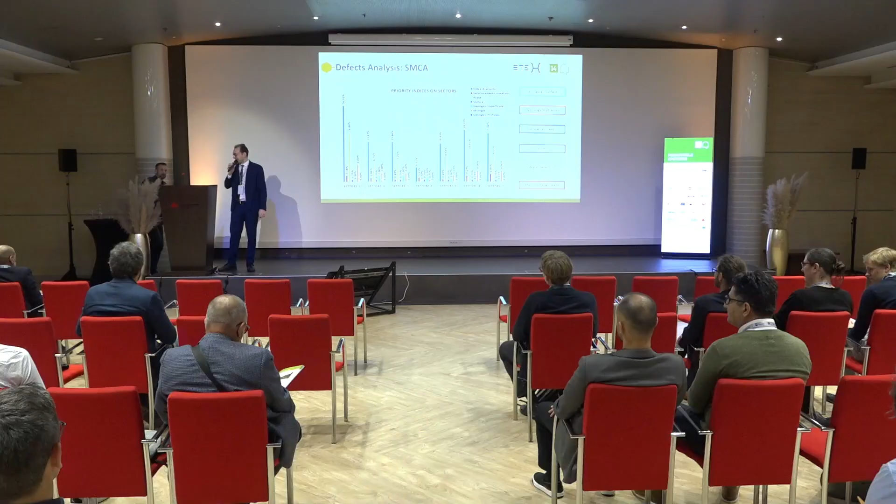As we said, we're going to continue one-on-one over lunch, because as a rule you can't really put anything between a human and his lunch, which is now. So thank you again, Federico. Thank you.